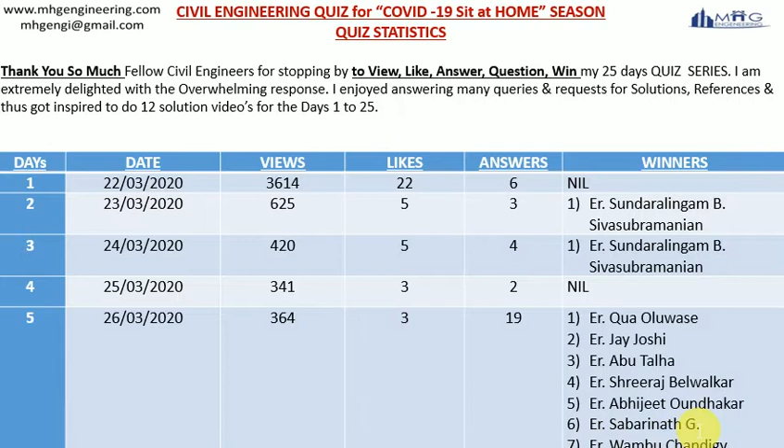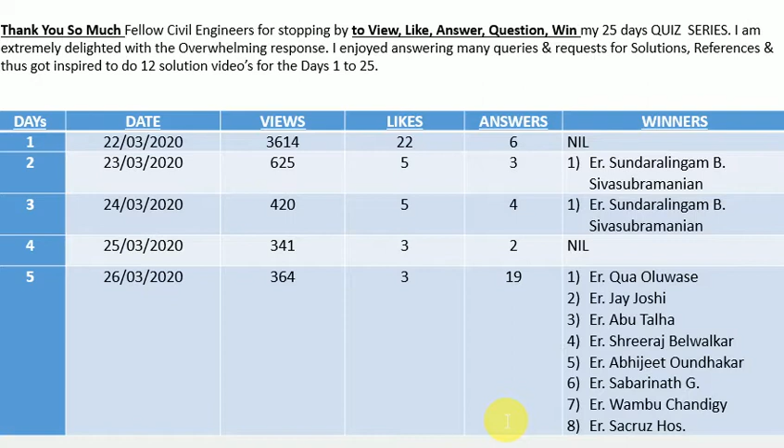Fifth day, 364 views were there, only 3 likes I got, and 19 answers were submitted by 19 different people, and the winners were many. 8 winners on that day: Engineer Qua Oluwase, Engineer Jay Joshi, Engineer Abu Talha, Engineer Shreeraj Belwalkar, Engineer Abhijeet Oundhakar, Engineer Sabarinath G, Engineer Wambu Chandigy, and Engineer Sacruz Hos. So this was about the 5th day. Next, I am continuing with the quiz statistics.

On the 6th day, that is 27th March, 517 views were there, 2 answers submitted, but nobody was the winner. 7th day, 948 views, 8 people submitted the answer, and 3 got the correct answers: Engineer Sundaralingam B. Sivasubramanian, Engineer Abhijeet Oundhakar, and Engineer Radhakrishna Chari. On 8th day, Engineer Kalpesh Barshi was the winner. 9th day, Engineer Sundaralingam B. Sivasubramanian was the winner. Then on days 10 to 18, more than 300, 400 views were there each day, many likes, and so many answers were submitted, but nobody got the correct answer.

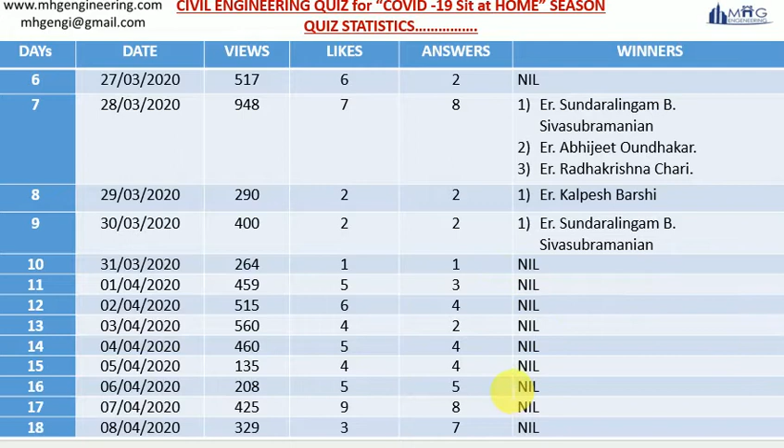Next, continuing with the quiz statistic, day 19, 538 views were there, 4 answers submitted, and Engineer Radhakrishna Chari and Engineer Glenn M were the winners. Again, on 10th and 11th April, nobody was the winner. 22nd day of the lockdown period, on 12th April, 491 views were there, 22 likes were given, and 9 answers were submitted, and only Engineer Kalpesh Barshi's answer was correct. On the 23rd day, 8 answers were submitted and 3 had correct answers: Engineer Radhakrishna Chari, Engineer Mrudu Bard, and Engineer Jonah Vasu.

24th day of the quiz, 14th April, 588 views, 6 answers submitted, but nobody was a winner, no answer was correct. And 15th, the last quiz day, 25th day, 182 views were there for the question, 4 answers were submitted and none is the winner. I have not yet disclosed the answers, so by this video I am disclosing the answer.

Nobody was a winner. Then from day 1 to 25, YouTube solution videos were uploaded. 155 views I got for the 12 videos and 18 likes. 4 people had commented with suggestions or asked for more topics. And 64 channel subscribers were there. So this is the quiz statistics. Next, I am still continuing with the quiz statistics.

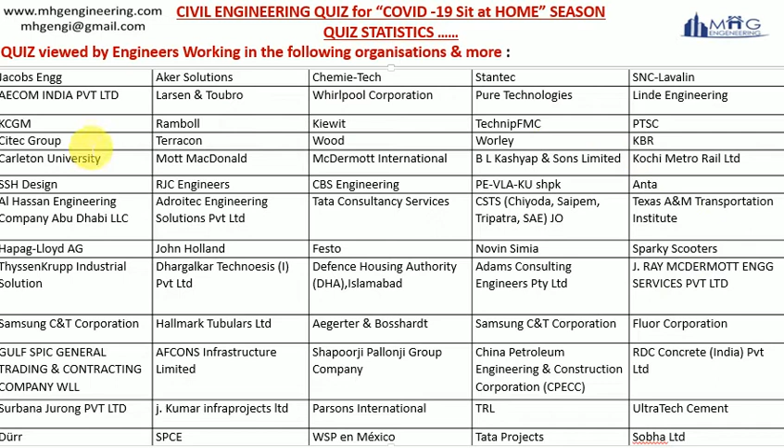The quiz was viewed by engineers working in the following organizations and many more. These are the various organizations, almost 50-70 of them which are known to me, and if the quiz was forwarded to many places, I really don't know who all saw it. So these were all the companies the viewers were from.

Next, continuing the quiz statistics, the people who viewed the quiz were engineers, civil engineers, founders, HR specialists, students, recruiters, process specialists, technology managers, university professors, research fellows, construction engineers, corporate trainers, project managers, senior consultants, designers, executive directors, so many people, so many designations, they viewed the quiz.

Next, the viewers were from the following places: from India, Delhi, Gurgaon, Indore, Amravati, Bengaluru, Vadodara, Mumbai, Kalyan, Kolkata, Madurai, Karwar, Ahmedabad, Teni, Bhopal, Parbhani, Surat, Bhimavaram, Pune, Hyderabad, Chandigarh, Cochin. So many places the viewers were there. From Pakistan also,

NWFP, Peshawar, a few engineers were continuously following me and they were contacting me, they were asking me queries also, and they requested a few code numbers. While discussing with them, I got to know about the codes used in Pakistan. So good knowledge sharing. Then from Mexico City also there were viewers.

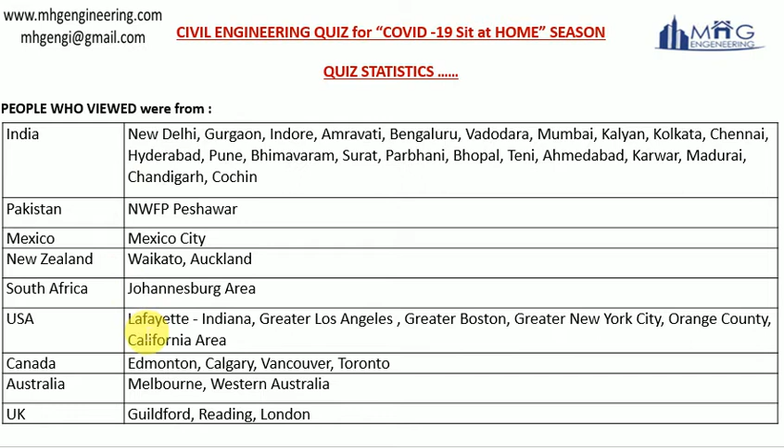In Australia, Melbourne and Western Australia, people were there in my contact list and they were sending answers. In UK, only 3 cities: Guildford, Reading and London. So these were the places from where there were the query viewers or quiz solvers. So after this quiz statistics, I'm not disclosing the winners. Winners will be disclosed in the end.

So now I'm giving solutions for 23rd, 24th and 25th, the last day. So day 23, Monday, 13th April 2020, question 1. For the machines pumping explosive gases, what is the minimum reinforcement in the concrete block foundation? 4 alternatives were given, and the correct answer is C, 40 kg per meter cube. For explanation, I have given reference of IS 2974 part 1 1982, cover page attached, and clause 5.4.5 attached.

So this is that IS 2974 part 1 1982. It is a code of practice for design and construction of machine foundations. IS stands for Indian Standard. This is the Indian code, and clause 5.4.5 says minimum reinforcement in block foundation, concrete block, shall not be less than 25 kg per meter cube. This is for normal rotary machines or normal pump block foundations.

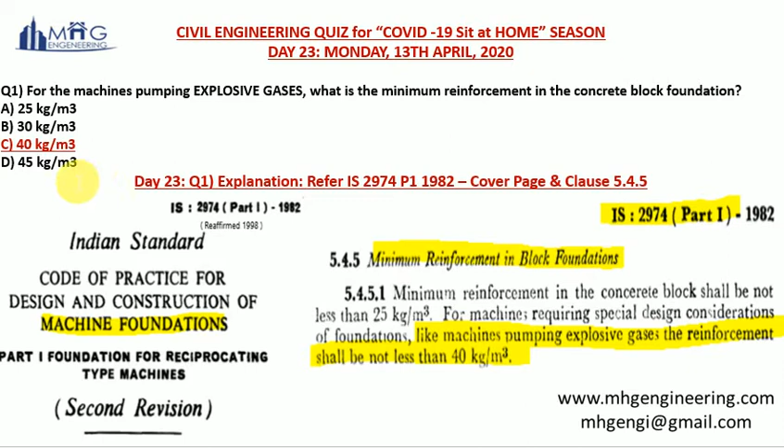But for machines requiring special design considerations of foundations like machines pumping explosive gases, the reinforcement shall not be less than 40 kg per meter cube. So this is the reference, and so C is the correct choice. Next, I am going to day 23, question 2.

The net safe bearing capacity of soil is equal to gross safe bearing capacity of soil plus gamma into Df, where Df is the foundation depth below ground level and gamma is the soil density. True or false? Obviously false. Many could answer this. It was a very straightforward, very simple question from soil mechanics. I have not, for a change, given a reference of any code.

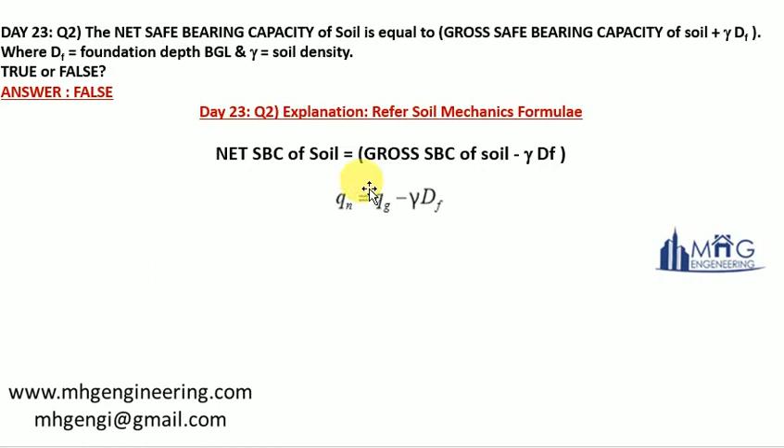Refer to any soil mechanics textbook. This is a formula, you will find it. Net SBC of soil is equal to gross SBC minus gamma Df. It is not plus gamma Df but minus gamma Df. This is the answer. So going next to day 23, question 3.

What is the maximum height a steel ladder can generally have without a safety cage? 4 alternatives were given, and D, 3.0 meter, is my chosen correct alternative. Now there can be dispute or discussions on this. So explanation I have given: PIP standard STF 05501 for fixed ladders and cages, and project standard drawings.

Then American National Standards Institute ANSI A14.3, which is American National Standard for ladders, fixed safety requirements. So first on this page I have shown the cover pages of 2 American standards. This is PIP standard, Process Industry Practices. I have told you about these PIP standards. They are used worldwide for the process industry. And the PIP standard for fixed ladders and cages is this one.

This is American National Standard for ladders, fixed safety requirements. It is ANSI A14.3 2008. Now these 2 standards say that a safety cage can be provided after 20 feet, that is 2 stories. Generally 10 feet is a single story, so 20 feet is 2 stories, that is almost 6 meters, and this is as per American standard.

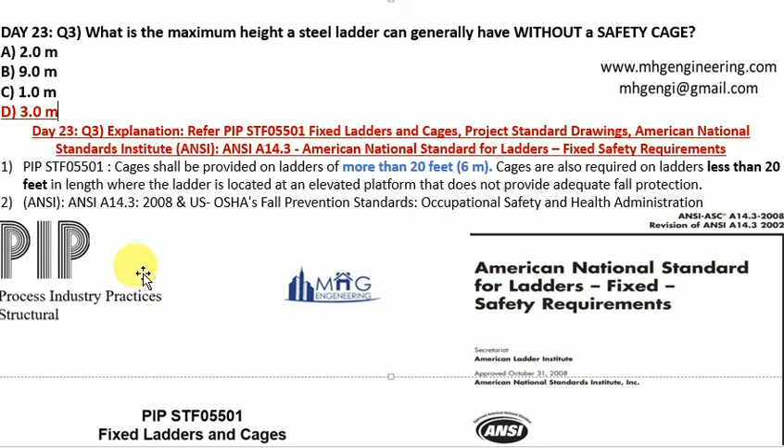So basically civil engineers will have to keep it in mind. If you are working in American standards in American locations, then cages can be put in the ladders at 6 meters above the grade level or above the starting point, but that is not the case with Indian standards.

So next page, same question, answer and references I am continuing. Refer IS 3694 P2 1991. It is an IS code for ladders, and NBC 2005, that is National Building Code. And also I have attached a part page of a construction standard drawing. So first look at this IS code.

Look at this corner, IS 3696 Part 2 1991 and reaffirmed in 2002. This is IS code for scaffolds and ladders, code for safety. So part 2 is for ladders. Okay. Now there is one more code, NBC, National Building Code.

Now few students ask me, few people, engineers also, they ask me like, you are giving references of so many codes which are there for designing and detailing of structure, that is structural codes. What about architectural features? So in India, for architectural features you have to follow NBC 2005, National Building Code, and I have attached a part cover page of NBC 2005 that also talks about ladders and safety cages.

And then many Indian oil and gas companies or process industry companies, they have their own standard. I have attached one of the standards, and they show in the standard that this is a ladder side view, and at certain height this cage is started and then there is a landing, and that height is 2.7 meters. And they say that cage should have clear headroom.

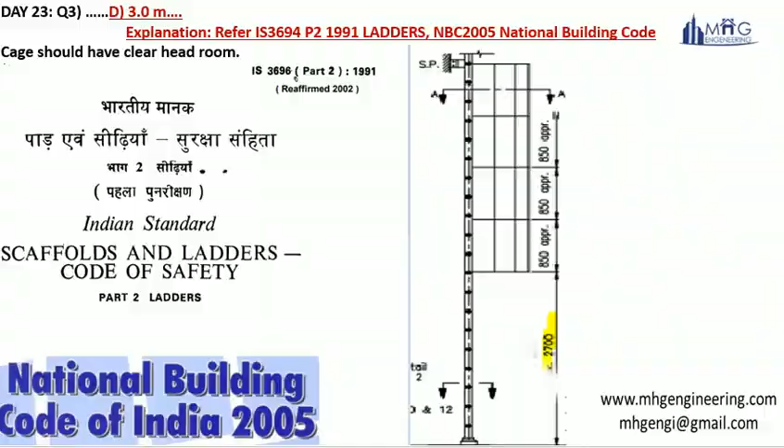Next, I am going to day 24, Tuesday, 14th April 2020, question 1. Refer below to the pipe rack typical bent. So bent in USA, it's a USA word, is grid, what we call it in India. So refer below to the pipe rack typical bent and the wind parameters from ASCE 7. Find the wind load per unit length at first tier only due to piping if center to center of bents is 240 inches. So this is the data given and this was the sketch given. So this is a typical pipe rack.

Now in earlier quiz questions I had told you about pipe rack. In process industry, lot of process is happening and lot of fluids are going from one facility to another facility. The fluids go in the pipes and these are the offsite structures which are called pipe racks, and they carry those pipes of different diameter. They will have different fluids, different diameter, different temperature, different pressure, different velocity fluids.

Generally topmost rack is for cable, electrical and instrumentation cable trays. So these are the trays in which cables are running. In USA, the electrical instrumentation cable facilities or cable trays are mentioned as raceways. You should know these words. So bent is grid, raceways is instrumentation electrical cable trays.

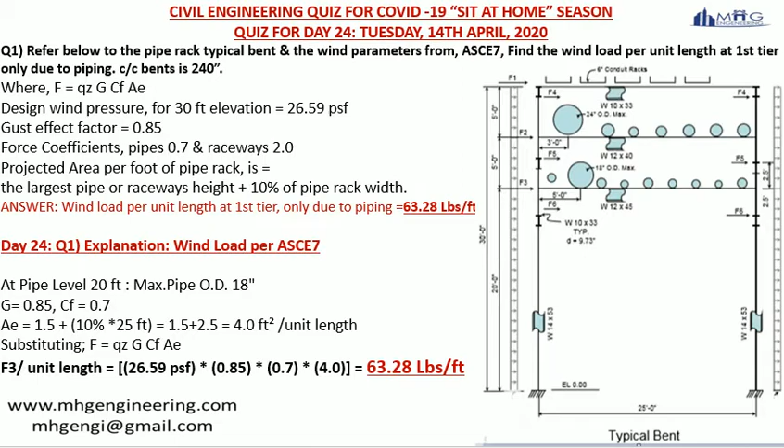Next, day 24, question 2. When moment resisting frame design is not used in the longitudinal direction, vertical bracing should be used to transmit the longitudinal forces from the beam struts to the foundation. True or false? And the answer is true. Very obvious this. I have shown, you can show any structure. I have shown a longitudinal view of a pipe rack. This is the longitudinal frame, and these are the beam struts.

The beams, longitudinal beams, are pinned with respect to the columns, and we require to provide vertical bracings to transfer the beam strut load and longitudinal load to the foundation. So in typical portal frame, transverse beams are designed and detailed as fixed with respect to columns, and longitudinal beams as pin connection with respect to the columns. Now the columns and the longitudinal beams do not have capacity to transfer any moment.

In such scenario, the vertical bracings, see these are A type, they can be X type also, or cross bracings also, or if there is some fouling with pipes entering or taking exit from this bay, then you can have K type bracing also. Okay, so in such scenario, the vertical bracings may be used to transmit the longitudinal forces, along the length of a pipe rack or along the length of a building, on the column transmitted as axial loads through the beam struts to the base plate and further to the foundation.

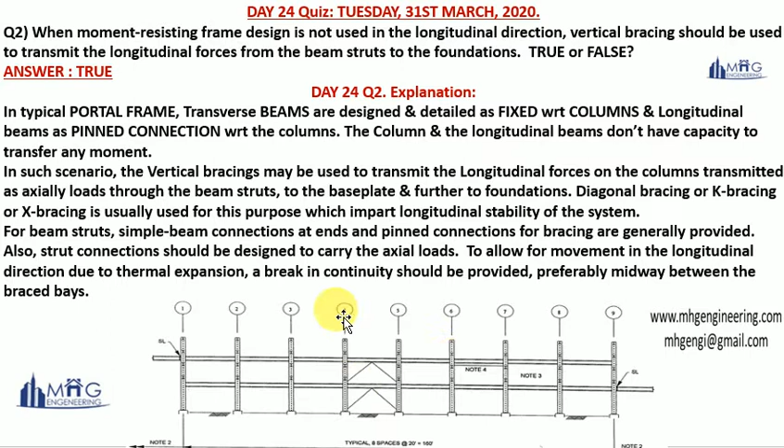Also, strut connection should be designed to carry axial loads to allow for movements in the longitudinal direction due to thermal expansion. A break in continuity or discontinuity should be provided, preferably midway between the brace bays. So this is the explanation. Answer is true. Many got it correct.

Next, day 24, last question, question 3. What is the ideal thickness of the masonry partition wall between the two adjacent oily transformers outside the electric substation facility? And answer is 345 mm. And the explanation, oily transformers, so I have attached a photograph instead of sketch, actual photograph, and these are the oily transformers outside a substation, big ones. They are separated by the walls, and these are the fire walls or 345 thick walls. There is a channel over here to support this gate.

They have a gate, and many times they have a roof also, shade also. So, this is an oily transformer, this is a partition wall which is 345 thick.

Now why? As the name suggests, this is an oily transformer, and in substation facility they can catch fire and explode due to presence of oil in it. Hence, they are located outside but just adjacent to substation building. They are never inside the building.

Now, depending on the electrical substation equipment layout, a series of oily transformers are kept adjacent to each other. Just see in the photograph, and separated by a firewall. Thus, even if one oily transformer catches fire, the fire is not transmitted to the adjacent ones.

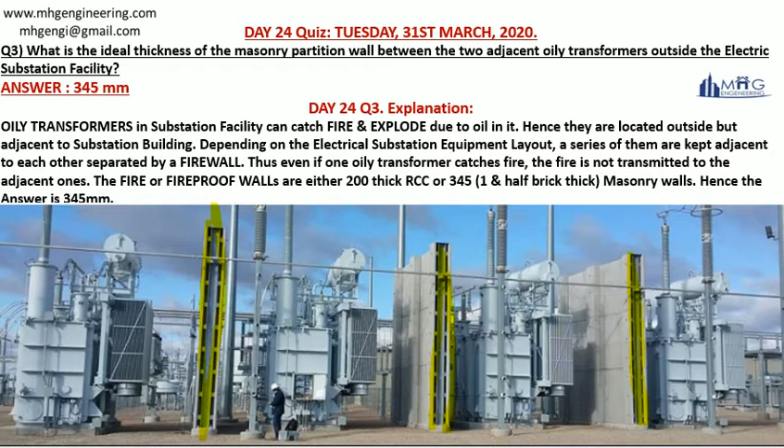Now going to the last question, the last quiz, day 25th, Wednesday 15th April 2020. Question 1. The American Welding Society throughout April celebrates National Welding Month to bring awareness to the welding industry. So on the occasion, somehow our quiz was running in the month of April.

American Welding Society celebrates Welding Month, National Welding Month. So I thought of dedicating this question to welding. Of course, nobody is in the celebration mood, but just dedicating this question to the topic of welding.

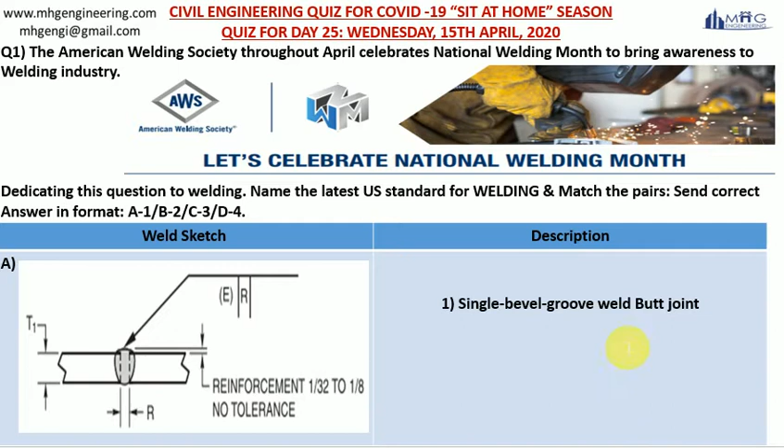Name the latest US standard for welding and match the pairs. Send correct answers in format A1, B2, C3 or D4, something like that. So I had given 4 sketches to the left, 4 types of weld, and on the right side 1, 2, 3, 4 I had given description of it. So do go through the quiz.

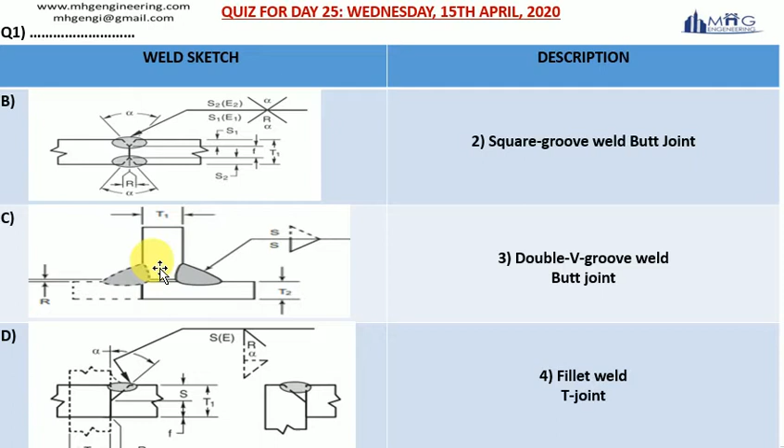So the answer is the American Welding Society latest code is AWS D1.1 2015, the structural welding code of USA, and I have attached a cover page. So you will come to know about it. AWS, American Welding Society, and this is the code number. 2015 is the latest version.

ANSI is American National Standards Institute. Okay, so just like our BSI for British Standard Institute, or ISI, Indian Standard Institute, or Bureau of Indian Standard, BIS, this is ANSI, and the correct answer is A2, match the pairs. A2, B3, C4 and D1. Many could answer this correctly. It was a very simple question.

Next, going to day 25, question 2. Which of the following raw materials has the least percentage in the composition of ordinary Portland cement, OPC? 4 alternatives were given. Silica, we know that A is silica. We know silica very high percentage is required. CaO also, calcium oxide, very high percentage required. So same is with aluminum oxide.

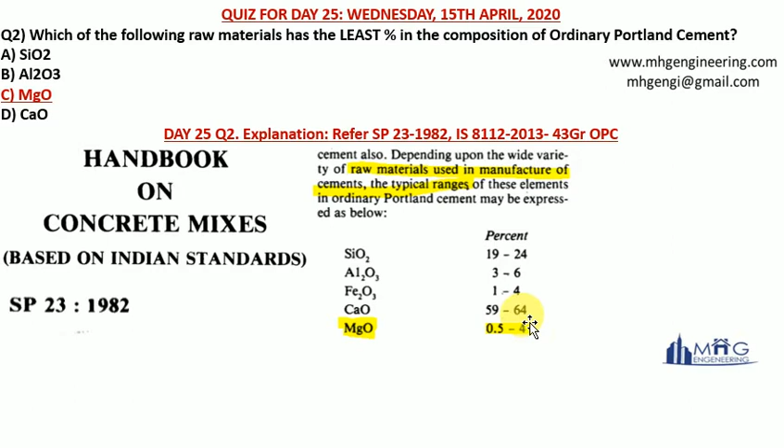And that is our answer. Okay, next, going to day 25, last question and last question of our 25-day long quiz series. Question 3. Design only the minimum total weld length required between secondary beam web and end plate using 6 mm thick fillet weld by Euro code.

Now again one more question in the welding week, but it is in the Euro code. Actually, if you want to be a global engineer, then you should be able to work in all the codes. Although in India all the institutes teach only IS code, but when you are working on international projects, you require to use different country codes. So Euro code is used in so many countries in Europe.

So design a weld length. The data says it's a primary beam 533 by 210 by 101 UB section. Now in India we use ISMB, but in Eurocode they call it UB section. Secondary beam is 406 by 140 by 46 UB section. In this, 406 is the total depth of the beam, 140 is the flange width, and 46 is not the thickness but it is the weight.

The shear connection uses end plate as seen in the sketch below. This is a main beam, and from both sides these 406 deep secondary beams are coming. For each secondary beam there is an end plate and they are welded. The side view of this connection shows the web of the main beam as a cut portion. This secondary beam comes and gets connected. The secondary beam has an end plate welded to its web, and the end plate is site bolted to the main beam. So we have to find the weld length.

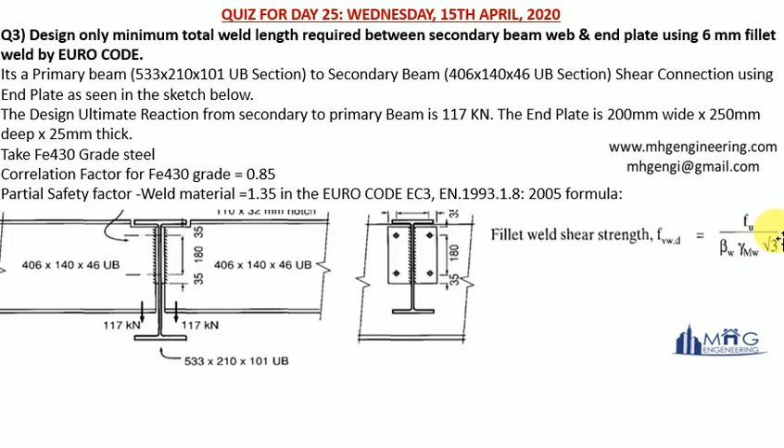Okay, next page. I am substituting the values. Before that, I am telling you the answer. The answer is minimum total weld length required is 130 mm. And how did I find out? Explanation: refer Eurocode 3, EN 1993 1.8 2005, clause 4.5.3.3.

As I said, chapter 4 onwards is for welding, so this is the clause. In this clause, the same formula is given - you have to just substitute. So Fu is 430, divided by 0.85 which is BW, partial safety factor for weld material is 1.35, and square root of 3. Substituting the values, fillet weld shear strength is 216 Newton per millimeter square.

Now we have the force. Area required for fillet weld is AW, area weld, equal to support reaction divided by this shear strength of weld. Support reaction was 117 kilonewton. So 117 into 10 raised to 3 divided by 216 Newton per millimeter square, we get the answer 541.67 millimeter square, which is the area of the weld required.

Now they have given in data that the size of weld is 6 mm. So throat thickness is 0.7 s, so 4.2 mm, and length is equal to area required divided by throat thickness. So 541.67 divided by 4.2, so 128.9 mm weld length is required, which I am rounding off to 130 mm, and that is the answer.